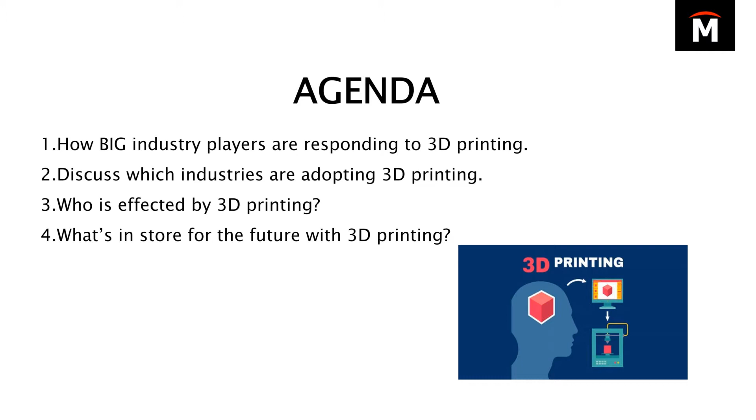The agenda for today is how big industry players are responding to 3D printing. We're going to discuss which industries are adopting 3D printing, who is affected, some of the positives and negatives of 3D printing, and finally what's in store for the future. So, positioning 3D printing for your industry.

3D printing has taken over 25 years to mature to what we see it as today. The future is fast becoming a reality when we discuss 3D printing. In 2016, the 3D printing market, which included metal, plastic, and ceramic, was a $5 billion industry. So forward-looking companies in a variety of manufacturing industries are now trying to determine whether and how to capitalize on this quickly developing market.

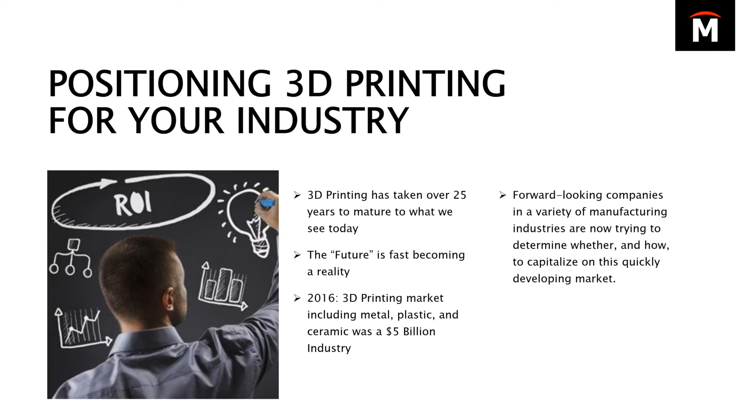According to Jeff Immelt, chairman and CEO of GE, additive manufacturing is a key part of GE's evolution into a digital company. In July 2016, the company introduced its first additive manufacturing component. This might sound familiar if you follow 3D printing at all - the company introduced this fuel nozzle for the LEAP jet engine. GE expects to be making 40,000 units per year by 2020, just a glimpse into the possibility of additive manufacturing in mass production. In the fall of 2016, GE acquired two suppliers of additive manufacturing equipment, further signaling its commitment to additive manufacturing.

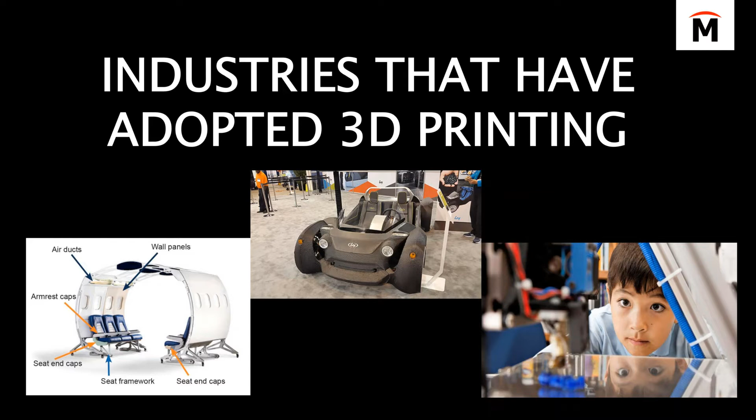Now we're going to take a look at some of the industries that have adopted 3D printing. I'm just going to focus on three of them. There's several across the board, but the three we're going to focus on today are automotive, aerospace, and education, kind of where it all starts.

New high-strength steels, along with composites and adhesives, are helping to reduce weight and increase strength in modern vehicles. Ford, for example, has been 3D printing prototypes for over 20 years to decrease design time. Recently, the company joined others in investing in a new 3D printing technology to explore using it as a means for production. The main driver in 3D printing for vehicles is not printing the entire vehicle, but a move to 3D print tooling and end-use parts. 3D printing jigs and fixtures can lower costs, providing lighter and more ergonomic tools. Furthermore, it has shown a consistent reduction in lead time by 40 to 90% and reduced costs up to 60%.

This is a new trend in the automotive industry for remanufacturing. Composites 3D printing, such as Markforged, using carbon fiber and fiberglass reinforcement, are improving strength on some 3D printable plastics. This is making them more attractive to the automotive market. It's projected that the automotive industry will reach around 530 million by 2021. An important factor will be the rise of composite materials.

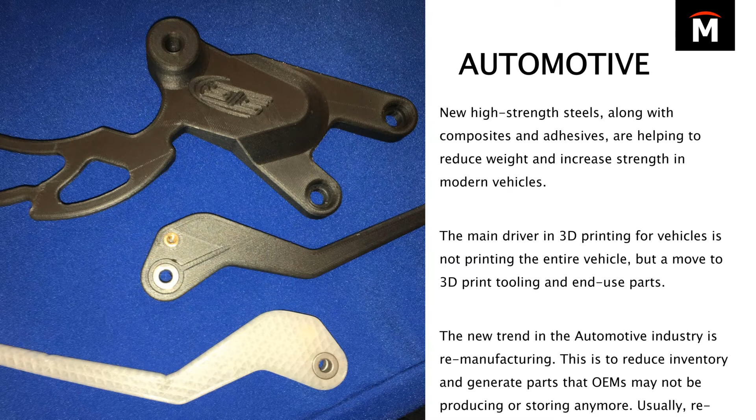Now taking a look at aerospace, among the first advocates of 3D printing, the aerospace industry is a driving force in the evolution of this technology for both manufacturing, end-use parts, and prototyping. Airlines depend on 3D printing to alleviate supply chain constraints, limit warehouse space, and reduce wasted materials from traditional manufacturing processes. Rapidly producing aircraft parts on demand saves enormous amounts of time, space, and money.

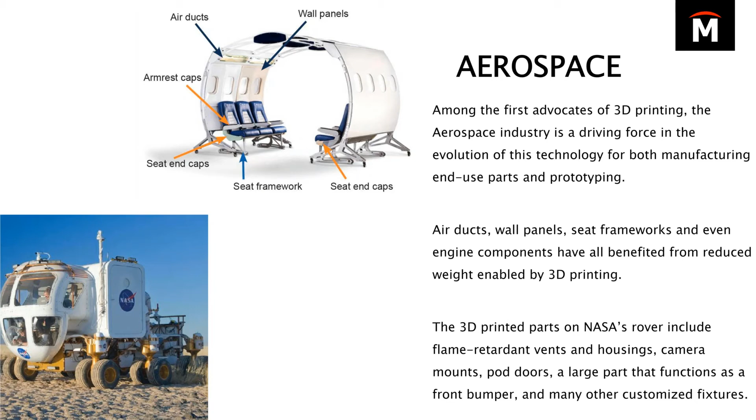FDM, or fused deposition modeling, printing, offers complex parts with quick turnaround time, which has helped NASA build customized housings and complex electronics assemblies that are needed to accomplish their goals. With an estimated $10,000 per pound of material sent to space, it is no wonder why NASA leaned towards 3D printing.

In the education space, many of us know 3D printing to be utilized in several different curriculums. 3D printing has an enormous potential and can be integrated into any subject within a school curriculum.

3D printing can greatly assist students' understanding of abstract equations and formulas. Honing 3D printing skills at school and university not only helps students to see, hold, test, and refine their ideas in the real world, but also gives them an enormous jumpstart to an exciting technology, which will surely affect many facets of their future jobs and lives.

An example here is the Snot Bot, which was created by some students at a university - a composite drone landing gear that they designed. The Snot Bot flies over surfaced whales and collects the liquid expelled from their spout. The robot is much less invasive than the traditional tissue collection method, which involves shooting a biopsy arrow at the whale. While using the Snot Bot is a much more effective method, landing the drone on a moving boat with rough wind conditions nearly always results in a crash.

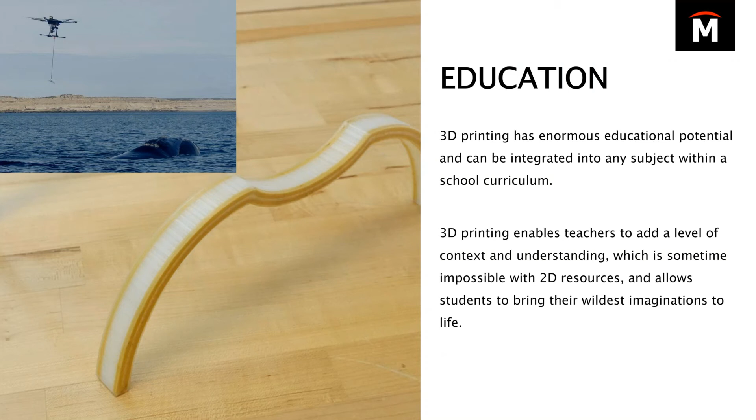So they went ahead and did several iterations of the landing gear utilizing the piece that you see on the screen there. The students were able to utilize several different iterations to come up with the best design, helping them gather the data. This further solidifies that 3D printing enables teachers to add a level of context and understanding, which is sometimes impossible with 2D resources, and allows students to bring their wildest imaginations to life.

So now that we're talking about the industries, let's take a look at some of the positive and negative effects of 3D printing. We're going to focus on some of the positives.

With current manufacturing technologies, consumer products are made in high volume for storage and then distribution. However, with 3D printers, only products that are sold need to be manufactured. This means warehousing of extra inventory is decreased. Less overproduction of product will also reduce costs.

Another positive is manufacturing options will only be limited by your imagination. Products are fully customizable. You can size and manufacture a product exactly according to your own needs.

Thirdly, there will be an increased need for engineers to design products and fabricators to develop and produce printers. Another job created will be for technicians to maintain, use, and repair 3D printers. Additionally, with the cheaper expense of manufacturing, more designers and artists will be able to bring their products to stores. Perhaps we can also have an increase in domestic careers to export products.

Now, on the flip side, we're going to take a look at some of the negative aspects. Currently, 3D printing can only manufacture products out of metal, ceramics, resin, and plastic. This is somewhat of a limiting factor.

There will be subsequent lawsuits because of infringement. And then thirdly, currently 3D printers are facing a roadblock with size. So far, 3D printers can only produce small products. People are researching bigger machines, but for now, they can only build small parts.

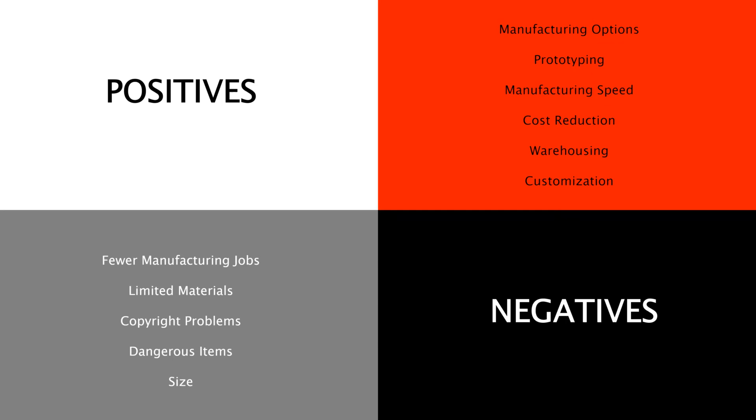The future of 3D printing is honestly unstoppable. In the coming years, 3D printers will be at the heart of full-scale production capabilities in several industries, from aerospace to automotive to healthcare to fashion. Manufacturing as we know it will never be the same.

Direct metal printing is getting faster and more capable. With many new technologies now coming into play, the number of metal alloys that can be 3D printed is on the rise. GE is a major player in the direct metal printing field, and the company predicts that the metal business alone will surpass $1 billion in annual revenue in the next couple years.

Complex and highly detailed products critical for the aerospace, automotive, and mechatronic industries will soon be available for production at a fraction of the cost. Companies such as Markforged have received several hundred million dollars of funding to deliver entry-level direct metal systems that print from a metal plastic filament.

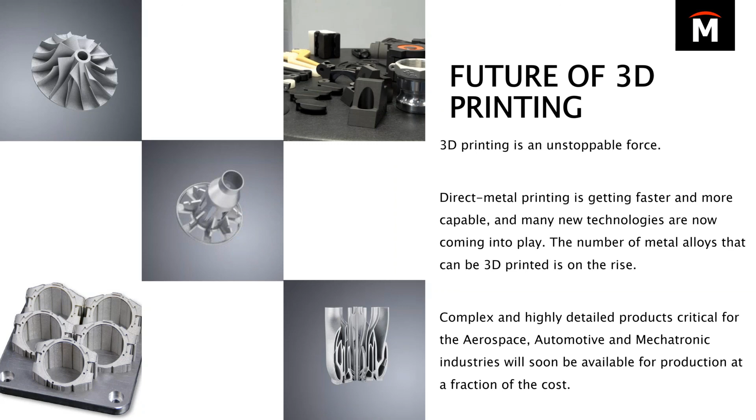So with that being said, depending on your industry and depending on your application, where do you stand in the future of 3D printing? Once again, my name is Amelia Parada.